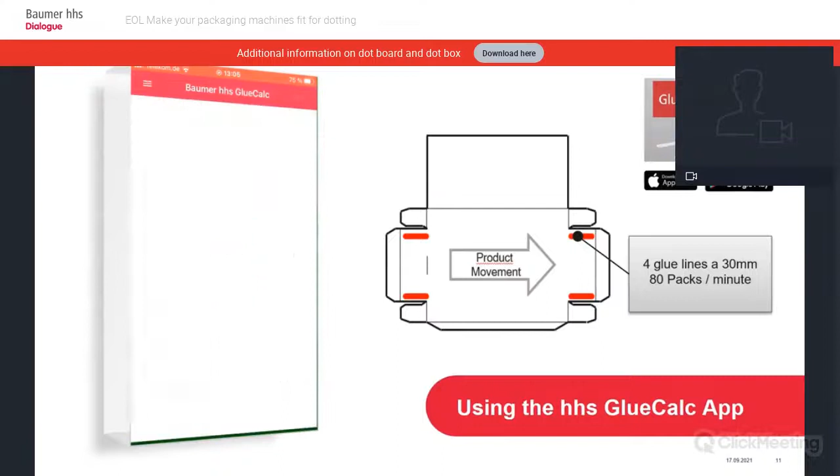When you start the app, you will find on the first page an OK button to start the calculation. In the next step, you have to enter your application settings. In our sample, we are using a carton erector with 4 glue lines on it. The length of our sample application is 30 mm for each bead. After that, we inform the app about our production data. In our sample, 80 products per minute and 120 production hours a week.

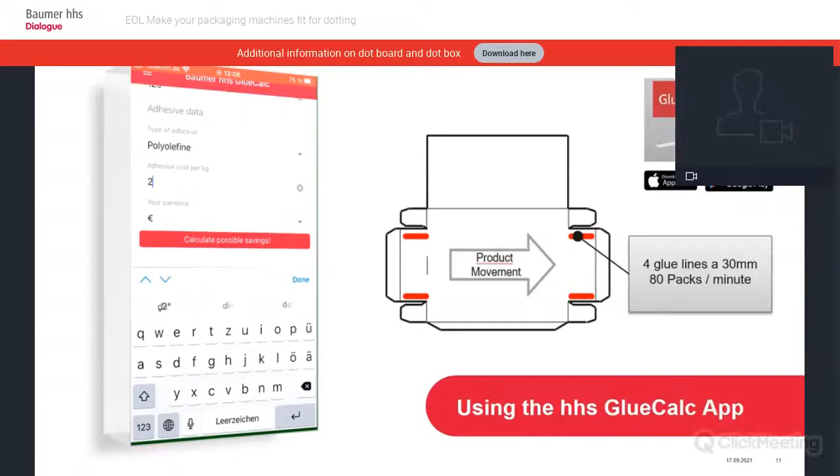In the next step, you fill in the adhesive data and your current glue costs. When you press the Calculate Saving button, you will see your production potentials in the graphic. With a 5 mm dotting, you get more than 20,000 euros saving each year, and on top, an annual carbon footprint reduction of about 80,000 kilograms. The result and the recommended production you can send to your mail address or share it with other people.

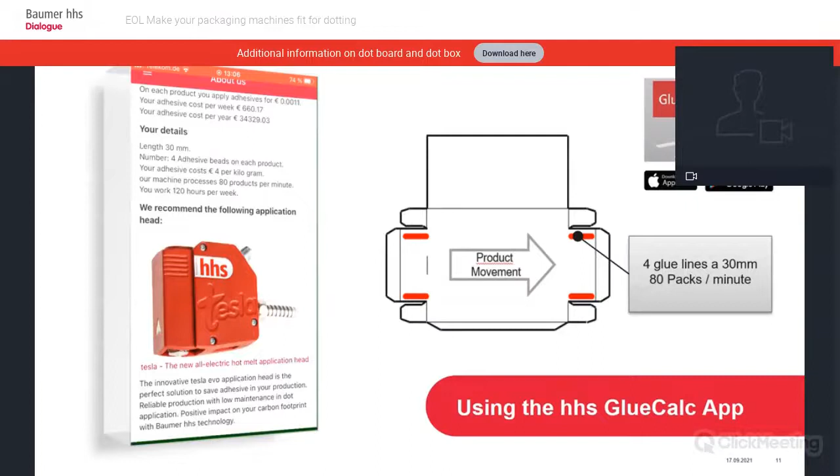And like quite often in life, sometimes less is more. And this is also the truth in gluing. Instead of squeezing glue out of the box, a dot pattern can fix the cardboard with a similar or even higher bonding strength.

Okay, our calculation is done now, but this is only theory. Let's have in the next step a look in our solution center. There we can see some of the products that we need to fulfill these calculated savings.

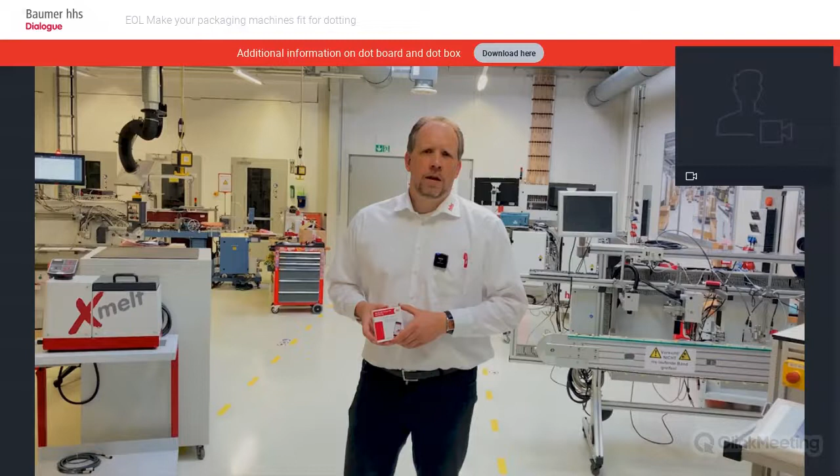Hello gluing friends, welcome to our Baumer HHS Solution Center here in our headquarters in Krefeld, Germany. My name is Martin Kotecki, and today I want to show you how you can react on a worldwide glue shortage, how you can reduce your carbon footprint, and how you can save money depending on your glue consumption.

The answer is dotting. With our dot box, we change from line to dots with a minimum effort. A lot of customers already started their saving program with our Dotbox Kit, and they saved more than 50% of their current glue consumption. So here we can see a conventional glue application, for example a pizza carton in a line mode, and today we want to show you how you can save this with a dot mode.

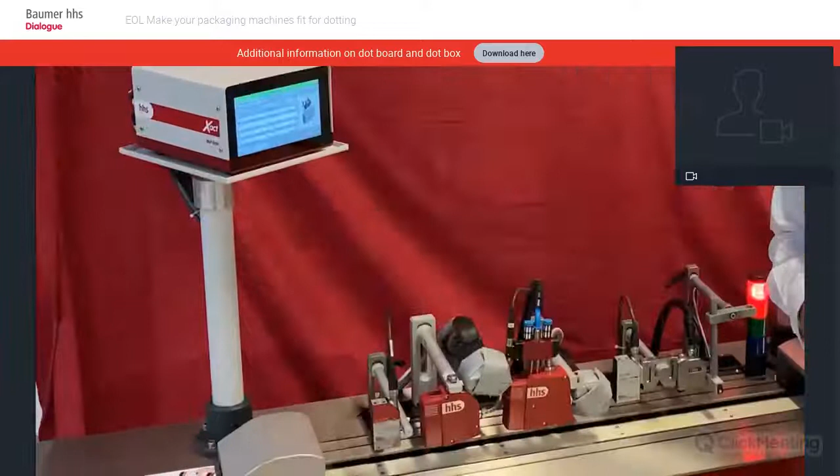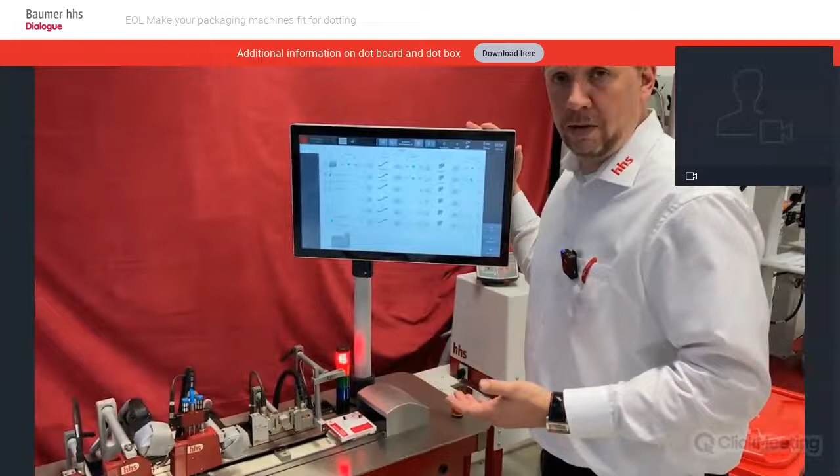We are proud that we have developed our Dotbox Kit, which makes a change from line to dot very easy. It just consists of our dot box and the Tesla applicator. On our simulator, we have an HMI that is driving our melter to set up the temperatures on gun and hoses, and also control classical applicators like pneumatic or our Tesla Evo gun, which can connect to a classic PLC. The PLC is driving a classical line application.

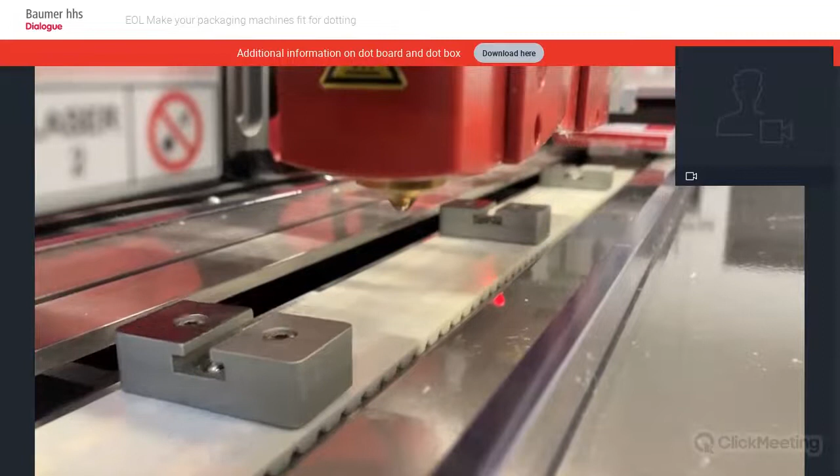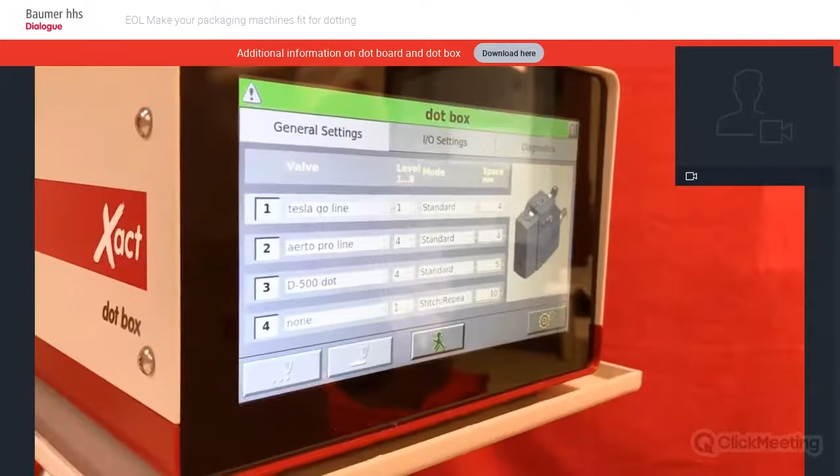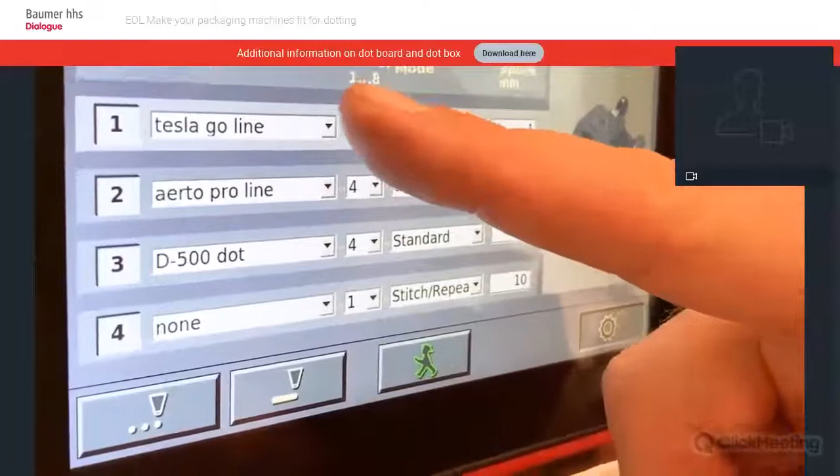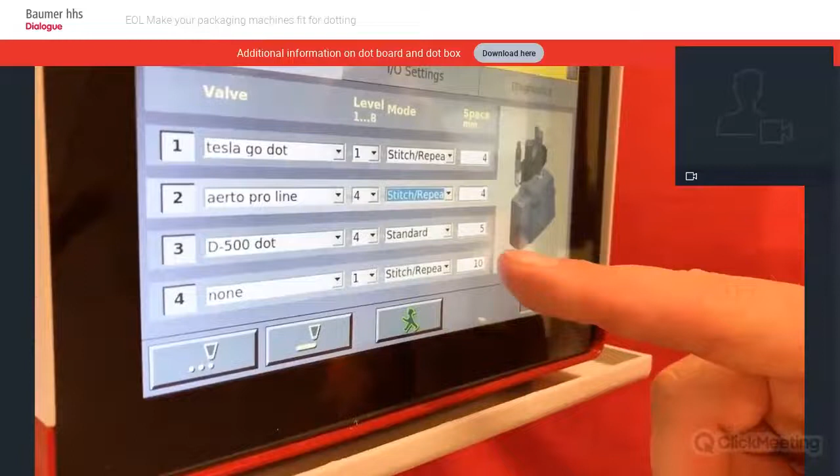To switch to a dot mode or to dotting, it's quite easy with our dot box. So we just press this button, the setup button, adjust the Tesla Go in a dot mode. We choose the stitch and repeat mode and set up the dot distance we want to reach in our application. The same, of course, we can do for pneumatic applicators. Now our dot box between the HMI and the applicator is changing from line to dots.

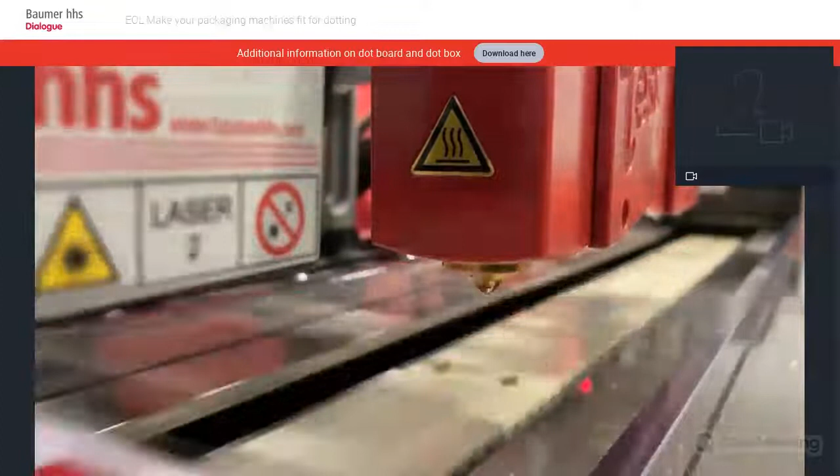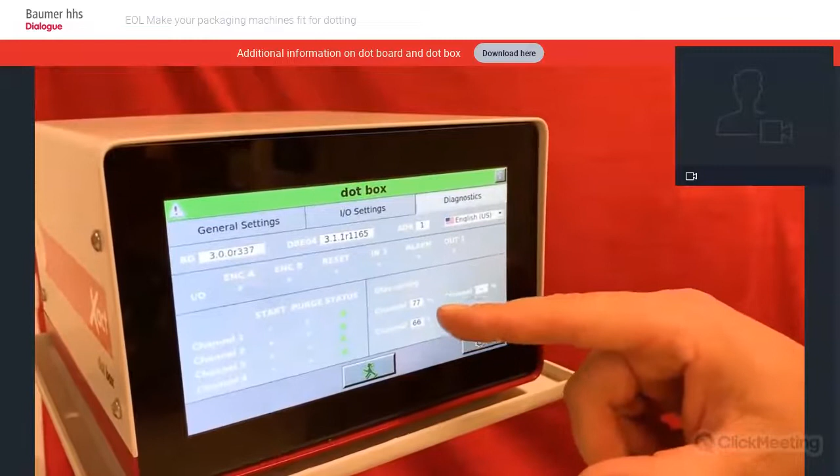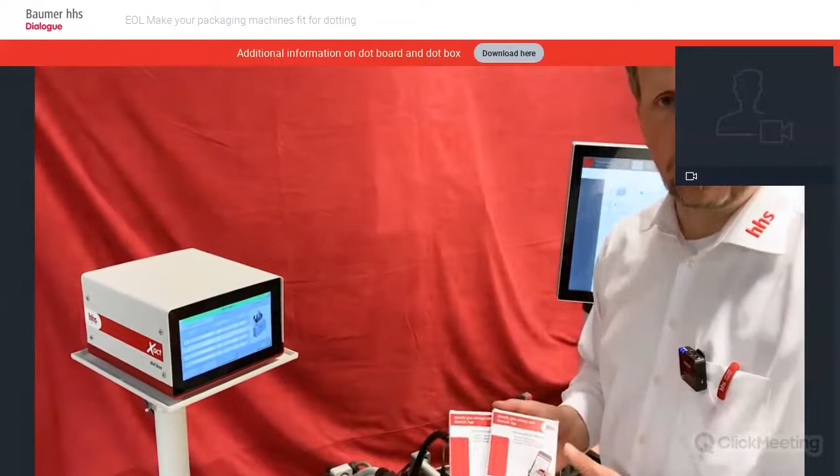So in our diagnostic tool we show directly how much glue you are saving depending on the dot distance and the dot size. So as you have seen, with the dot box it's possible to change the line in a dot mode with electronic or pneumatic applicators. We adapt the Tesla in the Dotbox Kit, so that is something which really makes sense to run your production with an electronic gun and with our dot box.

So for us, the Dotbox Kit is something like a starting kit that gives you the chance to check your calculation in practice. The kit includes 2 Tesla valves that can be connected to Nordson or Nordson compatible gluing systems. There is 1 dot box that can drive maximum 4 glue valves and generate your dotting pattern. As well, you find in the kit different screw-on nozzles with different diameters and 2 standard packaging brackets.

In case that the standard mounted 180 hose connection doesn't fit, there are also 90-degree and 45-degree hose connections included. Of course, you find also the right connection cables to solve a replacement in less than about 2 hours. Because of the low price for the starting kit, we expect that you can reach the return on investment in less than 3 months.

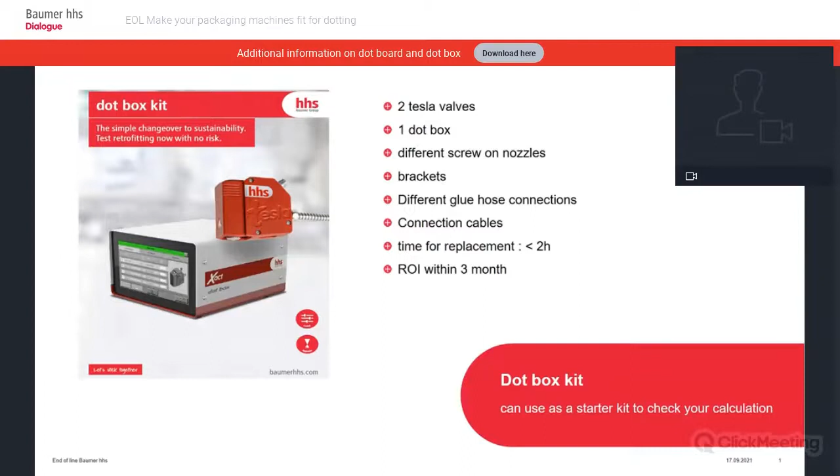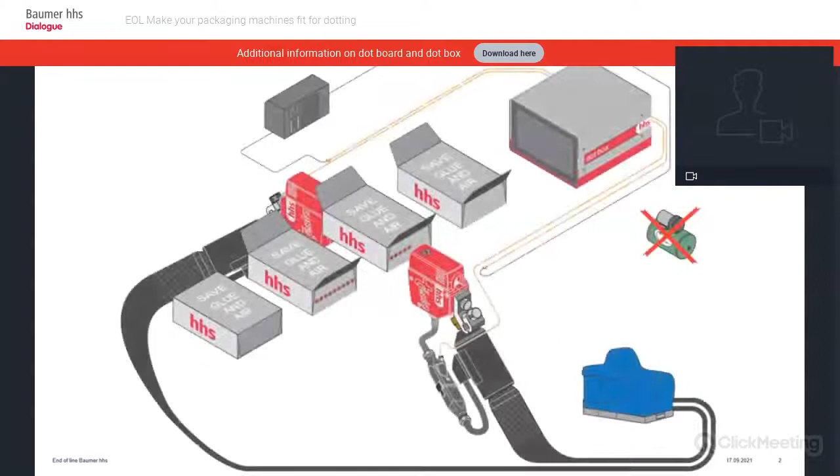Your current situation is maybe like this. After installing the kit, it should look like this. And that has the wonderful green effect that you don't need the compressed air anymore.

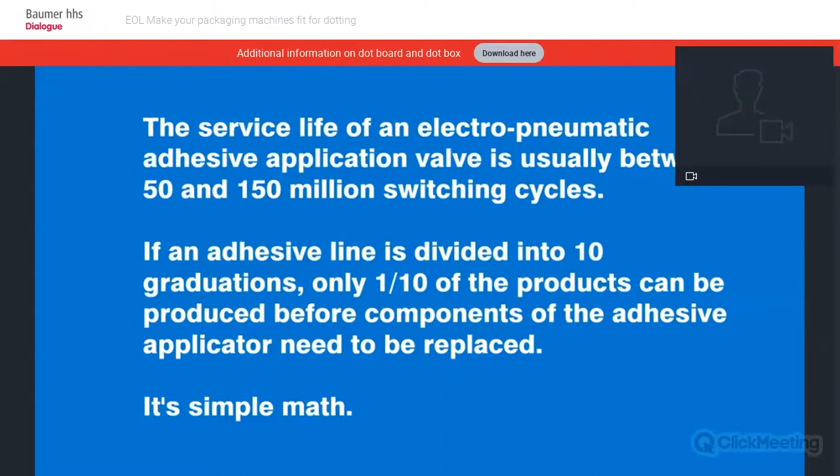It's simple math. Depending on what type of adhesive dispensing applicators you are using, your savings made through stitching and dotting may be at the expense of higher spare parts costs and downtime associated with changing them.

Why don't businesses realize they are paying more and saving less than what they could? The answer is, many companies have become accustomed to this situation and are not aware of the high cost of the spare parts used in their hot melt applications.

Electromagnetically driven adhesive applicators, such as the Baumer HHS Tesla, have a 10 to 20 times longer service life.

Why do many adhesive dispensing suppliers want you to stitch or dot with your current electro-pneumatic applicators? There are 2 obvious answers.

The first answer is simple. By offering you electromagnetic applicators instead of their standard electro-pneumatic, it would destroy their business model.

One of the leading suppliers of hot melt systems publishes that it generates 54% of sales from spare parts and services. Why would the supplier jeopardize that?

The second answer is, all suppliers have electromagnetic applicators in their stable of products. However, these have often been neglected in research and development and are no longer state-of-the-art. Most suppliers only use their electromagnetic guns when pressured, and often they only work in very limited situations.

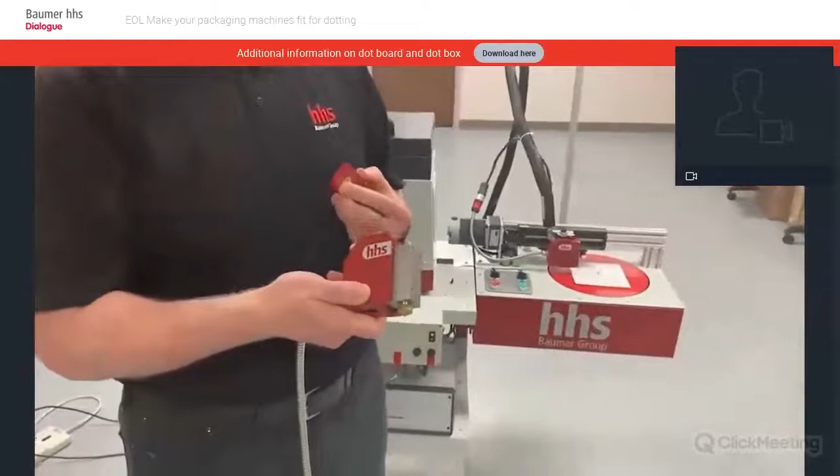And what's nice about it is it runs off the same 24-volt signal that your pneumatic applicator runs off of. So there's really no change for what you have to do in order to go from pneumatic to electric. This also means that you're not using compressed air any longer.

Compressed air is a very expensive resource, and it's something that you have to bring to the machine, you have to bring to the gun, and a pneumatic gun will operate differently depending on what type of pneumatic pressure is coming to it.

If the pneumatic air pressure drops, then the gun doesn't cycle, or it wants to string, or it wants to drool. You'll never have that problem with a Tesla gun. You'll always operate the same way each and every time.

The Tesla is also very, very robust. I wish you could feel this, but it weighs about twice that of a pneumatic applicator. It's a tank. It will last a very long time.

So you're looking at about 1 billion cycles for this gun versus 50 million for a pneumatic applicator. Now, we talked about how to dot your way to a greener day.

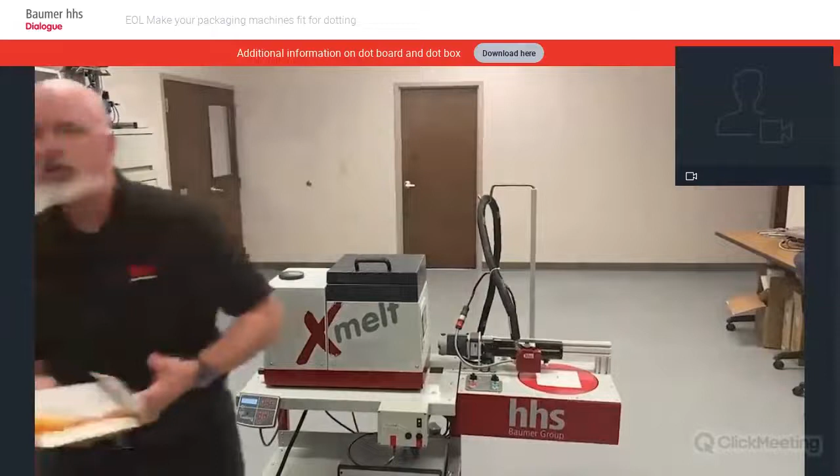So what does that mean? What we're going to do is, on a packaging application, take what you normally would do as a bead, which would be a solid line of adhesive, and instead we're going to dot it.

We're going to take that 24-volt signal and run it through a dot box, and we're going to break it into these dots. When you have a very long bead, there's a lot of residual heat that sits in the product.

So that can lead to pop opens a lot of times. You have to think about it as a jelly sandwich - if you've got a carton and both sides are glued together and it pops open with glue on both sides, then you've got a cohesive failure. A lot of times that's because there's too much adhesive on the carton, and that's why you get the pop open. Going to dotting really eliminates that, because now you have very individual applications of glue.

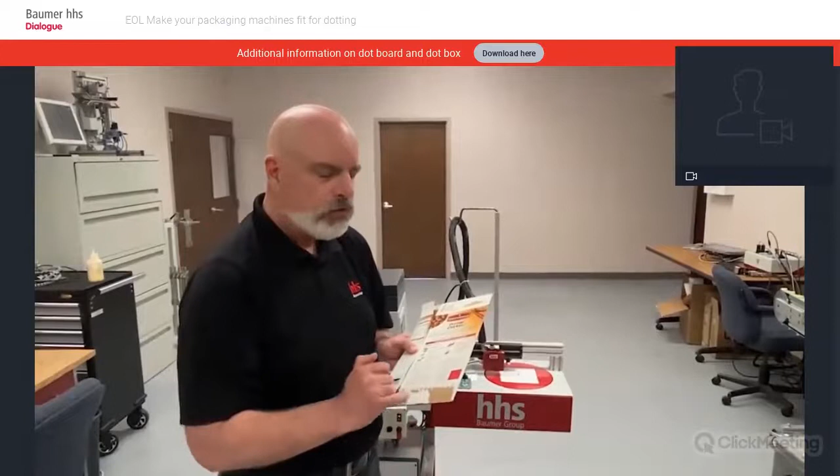So I'm using 50% glue, and you can still see how I'm getting great fiber tear. If you try to stitch a bead, you're still basically having just larger beads with a small break in between, so you're really not gaining that much for your application. But in this case, when we do the dotting, we're reducing glue by 50%, and we're still getting a good tear pattern.

Now, you may not know about Baumer HHS, but we've been in the business for a long time. We're really known for making the folding carton. The application that we do is for very high speed cold adhesive gluing. Cartons like this will run anywhere between 1,000 and 1,500 feet a minute. That's incredibly fast, much faster than what you normally run in general packaging.

So what this does is it says that we know how to run an electric gun, we know how to make an electric gun last long, and we know how to dispense the adhesive. We've taken that knowledge and transferred it to hot melt technology, and that's what we've done with Tesla.

In order to get the Tesla to work the way you want it to, we've developed a dot board. What the dot board does is it takes that 24 volt signal. We're able to program it, and this can go either into the OEM box and run from the PLC and take that 24 volt signal, or we have a dot box that we can sell that goes in between the applications. So you can either do it inside, DIN rail mounted, or as a separate box in the system itself.

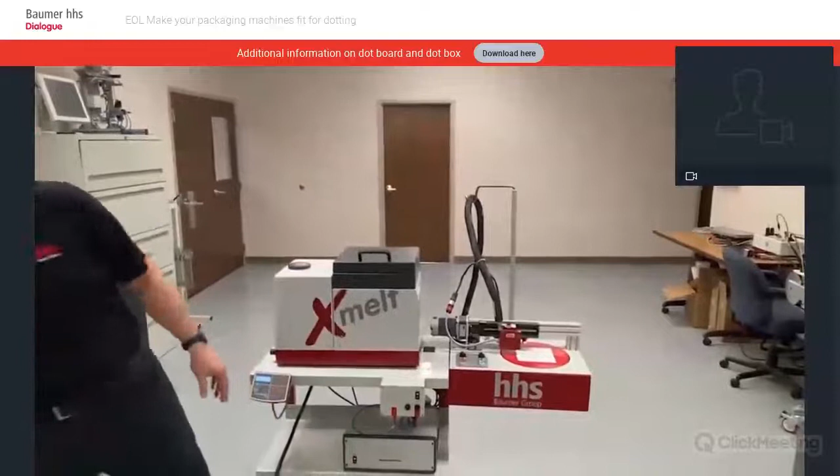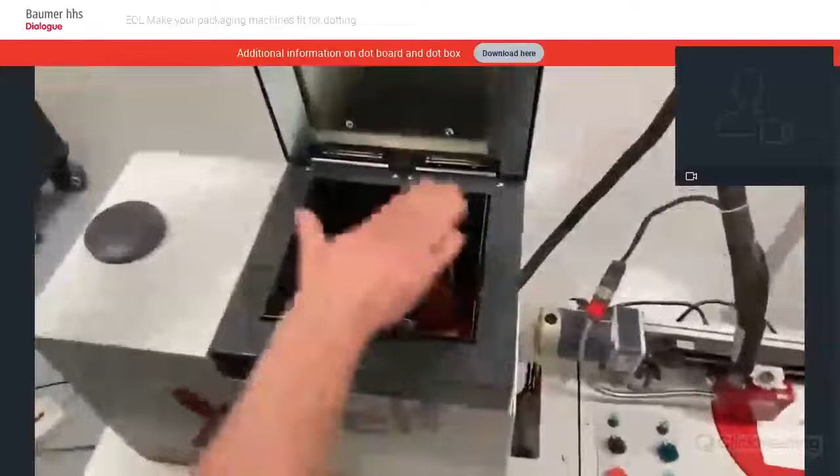Now in this application, we're showing all HHS. So what we have is our Xmelt unit, which warms up in about 20 to 25 minutes - that's typically twice as fast as most melters in the market right now. So you're using a lot less heat. The way this is set up, if you want to take a quick look, we've got it set up so it's got the fins, so the top portion is unheated and only the bottom portion is heated.

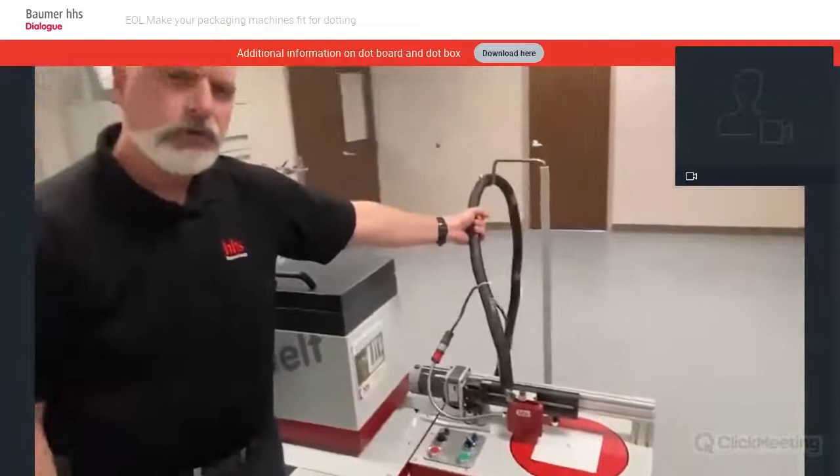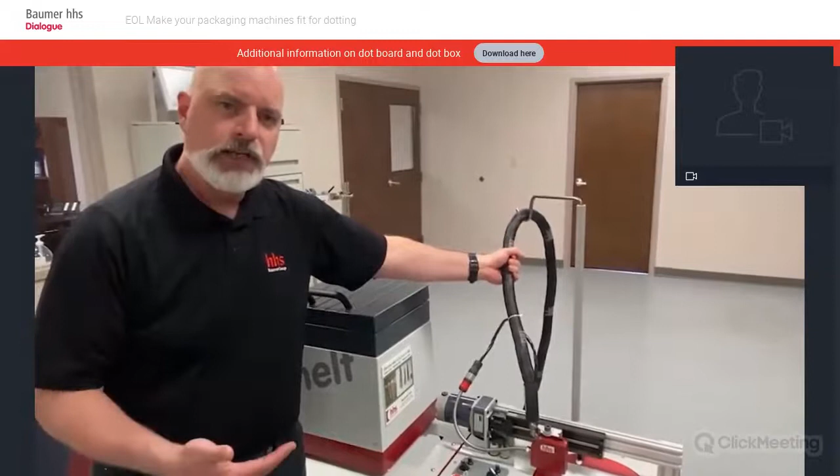We run that through this hose, and this hose is only 30 millimeters in diameter. Most hoses are 45 millimeters in diameter - it's like trying to wrestle an anaconda through your OEM machine. By being able to go to the smaller diameter hose, you're not losing anything because the hose core is the same as what it would be on the larger 45 millimeter hose. So it's an 8 millimeter hose core, which will give you the same flow. You're able to get the flow and have a smaller overall profile, which is very beneficial for any type of maintenance, or if you're trying to take longer hoses through the machines.

And then it comes to our Tesla gun. This whole system right now is set at 350 degrees. The Tesla with the cover on it - what this cover does is it protects you. So for incidental contact, when you're trying to change a nozzle or take this off, it's going to protect you from coming in contact with it. And that's a really beneficial safety aspect for the machine.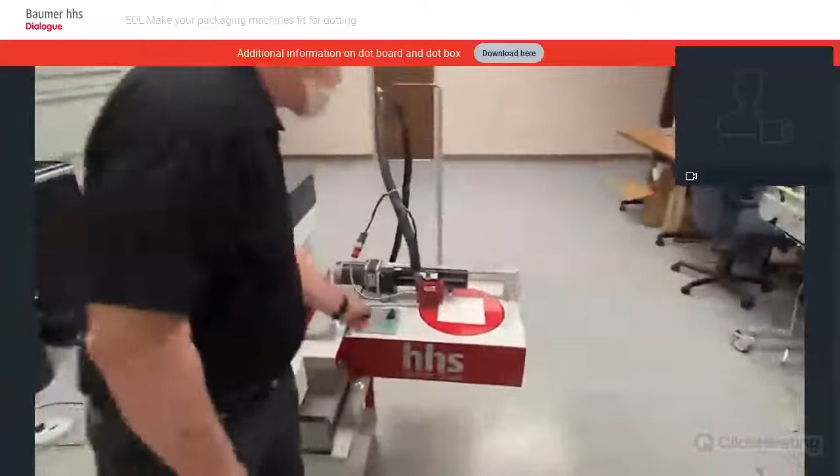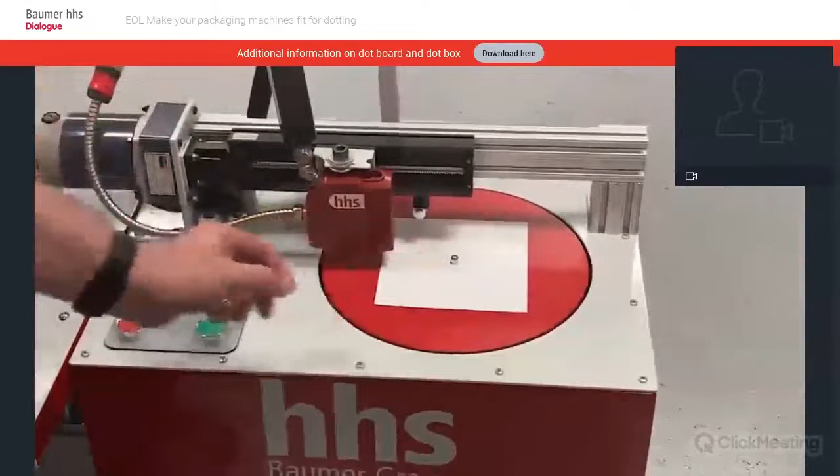Now what I'm going to do here is I'm going to show you something here with the Tesla gun. So what we're going to do is a 50% glue savings demonstration. I'm going to run the gun, and I'm going to run the speed of this very slow. And you can see here...

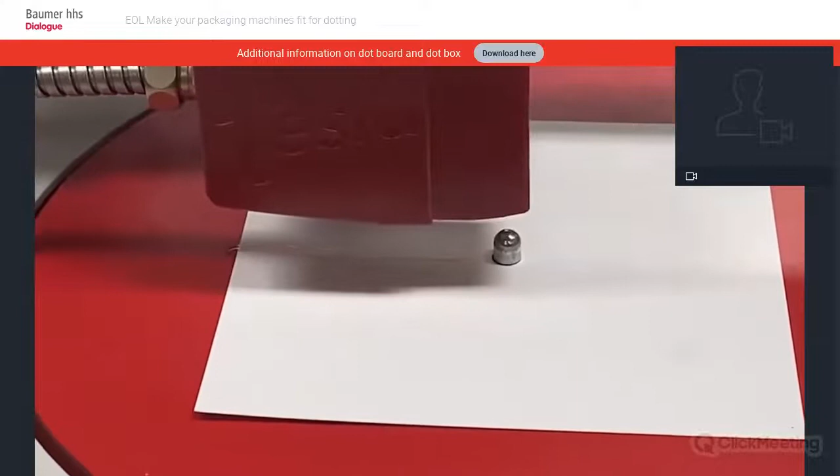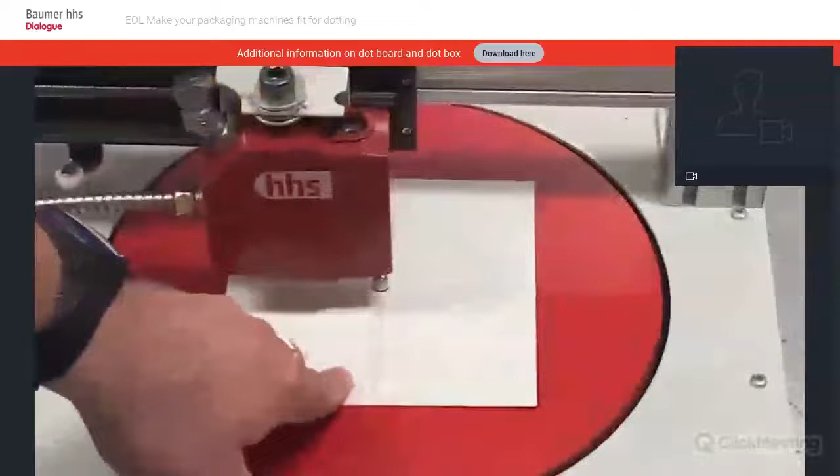The Tesla is very quiet, almost 30 decibels quieter than a pneumatic valve. And from what you can see here, this is 50% glue savings at that speed. You can see that it's almost still a solid line, but there's 50% less glue at that same speed as what you would have in your application if you were doing that full bead.

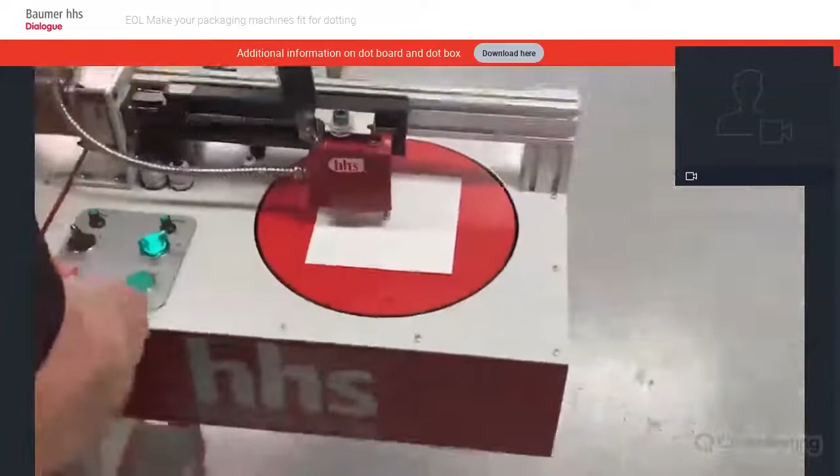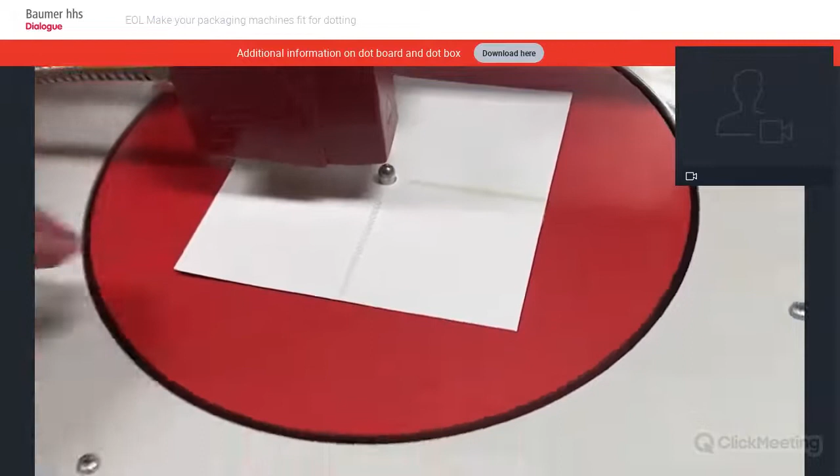Now what I'm going to do is run this again at a faster speed. Here we go. And you can see here, now we've got the individual dots, and you can start to see the individual dots as the speed increases.

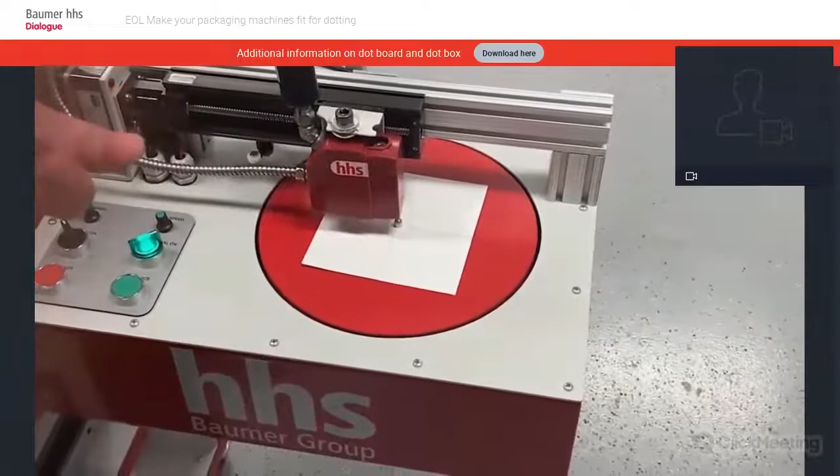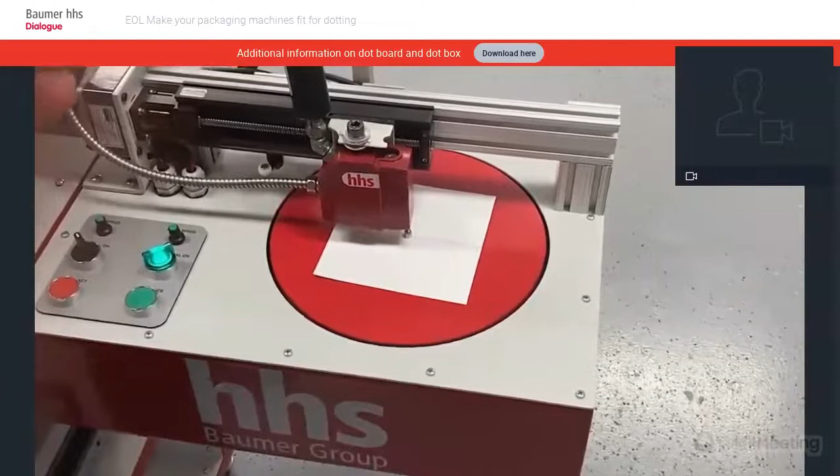So we're going to take this back one more time and increase the speed. And you can see the dots spread out, but the dots have remained the same size as we go through the whole aspect of this demonstration.

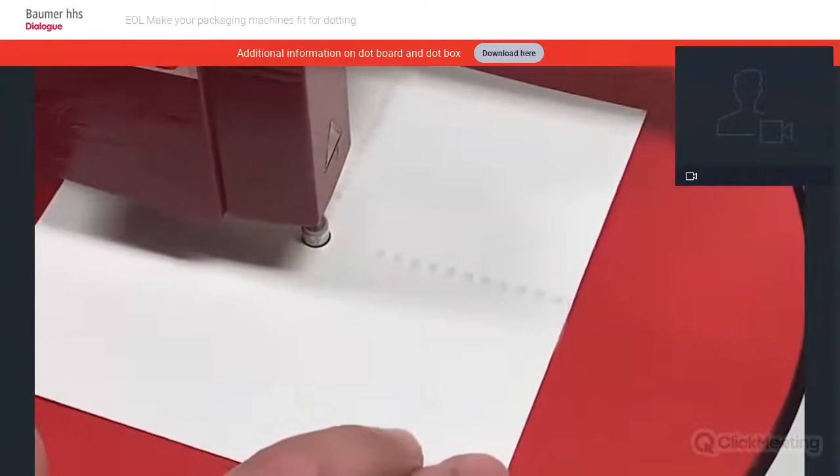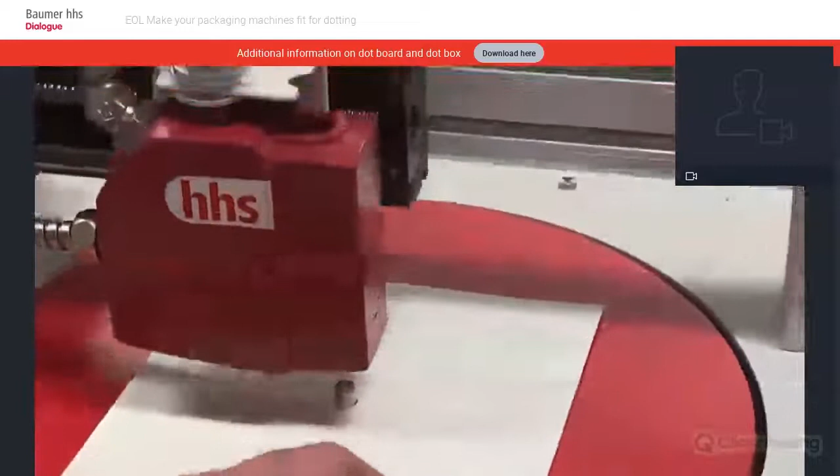So let's take it back for the final one, move it forward a little bit, there we go, and then we're going to do the final one at high speed. So you can see that the dots are the same no matter what the speed is. You're able to have the same amount of volume every single time, no matter what your speed is.

So this is a really great way to control your volume, to control the amount of adhesive that you use, and still get a really good bond on your application. Now, if you'd like to know more about this, at the end of this demonstration there'll be a chat on the website, and we'd be more than happy to answer any questions you may have.

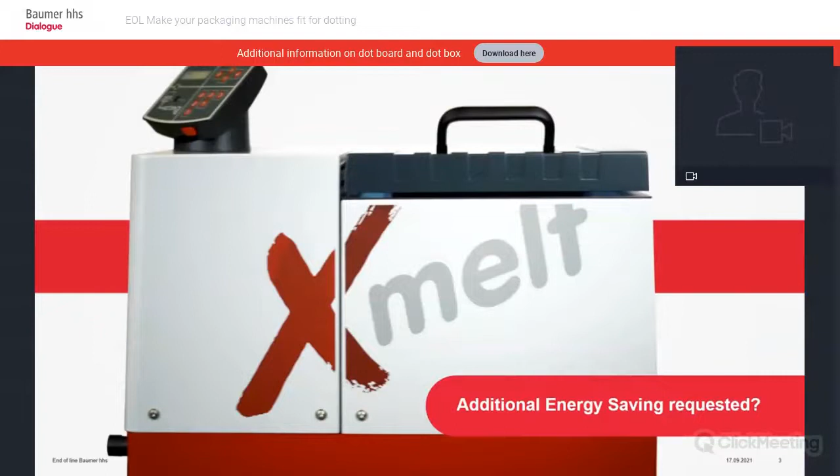With our Xmelt unit, you can even improve your energy balance by 56%, depending on what kind of gluing unit you are using right now. So if you are interested in that as well, don't hesitate to contact your local Baumer hhs gluing friend.

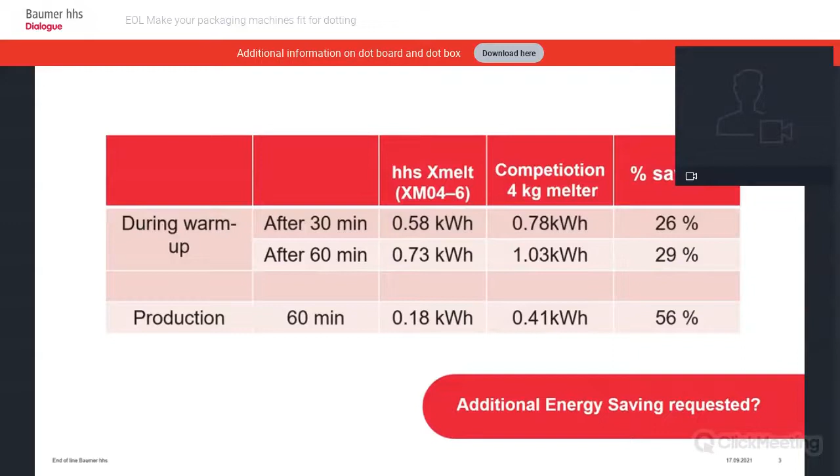Okay, our third step is done. We have understood why the hhs equipment can be useful for the packaging industry. Before we start our dialogue, let's have a look at our fourth step, the experience in the market.

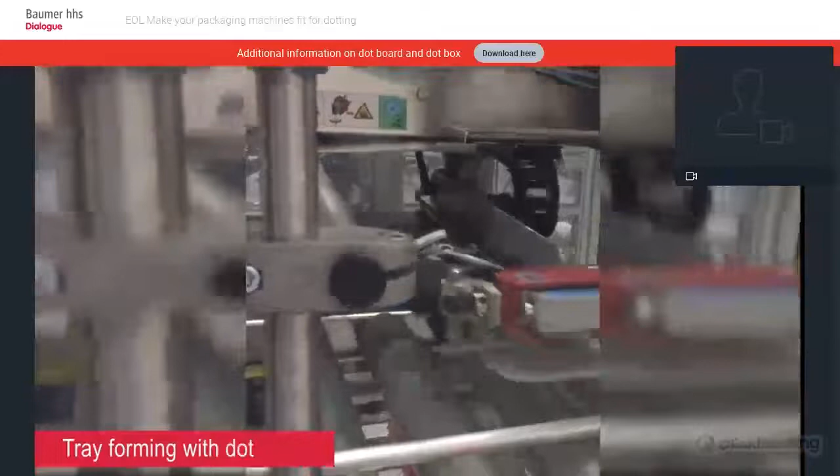Yeah, thanks to Rick in the United States, and coming back to what he's saying about the gaskets: Tesla is running without the dynamic gasket, which you can see in the animation.

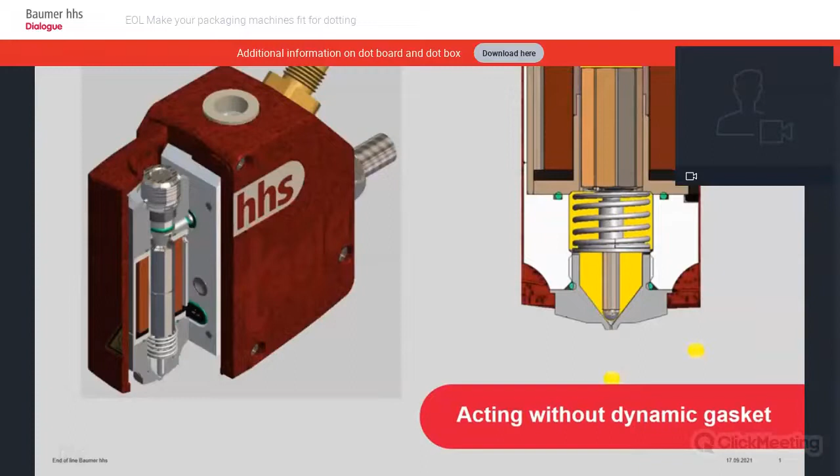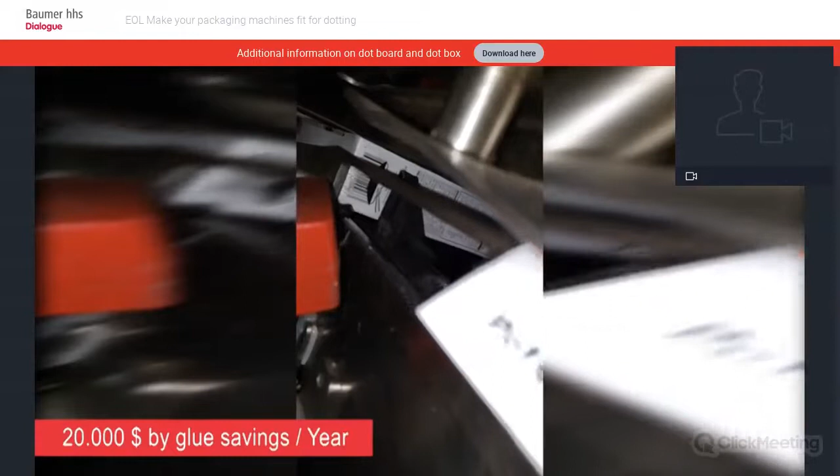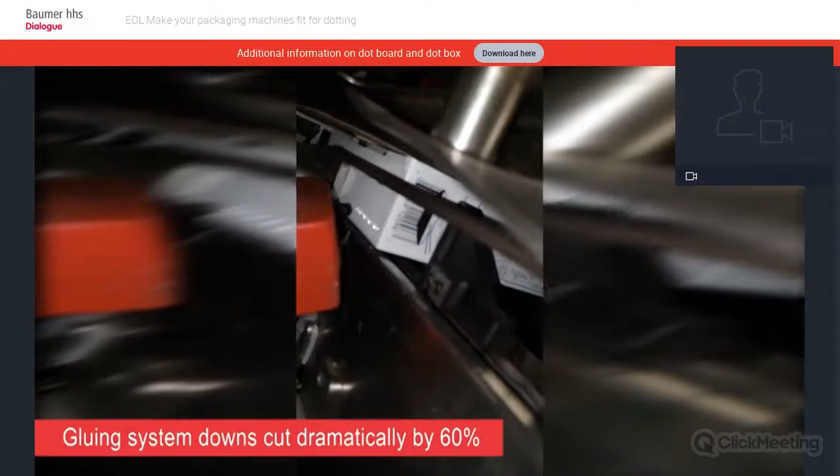Hi, this is Victor Sheldon from Mountain View Packaging in Boise, Idaho. Our experience with the HHS Tesla guns and dotting program has been phenomenal. In our first year, we saved right around $20,000 in glue savings by just switching over to the dotting system, as well as cutting glue system downtime dramatically, about 60% less than what we were having prior to our glue systems.

I hope those videos give you a help for what you can do in your production. At least we would like to have also a short look at our gluing friend Tongli Wei in China. He is the head of Baumer HHS in Shanghai and helped a customer in the beverage industry. In the first step, he was doing what we have described today in our webinar on a first packaging line.

In the second step, he made a rollout plan to do the improvements for the complete factory. With the shown production data, he saved about 300,000 euros each year, and on top of that, after 2 years he is still running with his first Tesla valves.

Ladies and gentlemen, we have finished our 4-step program for today. We have learned how we can make our packaging world a bit better. Packaging is always important because it is saving our food and goods that we have produced with the energy of our planet. At least we are also happy that our corona vaccine was even packed very well.

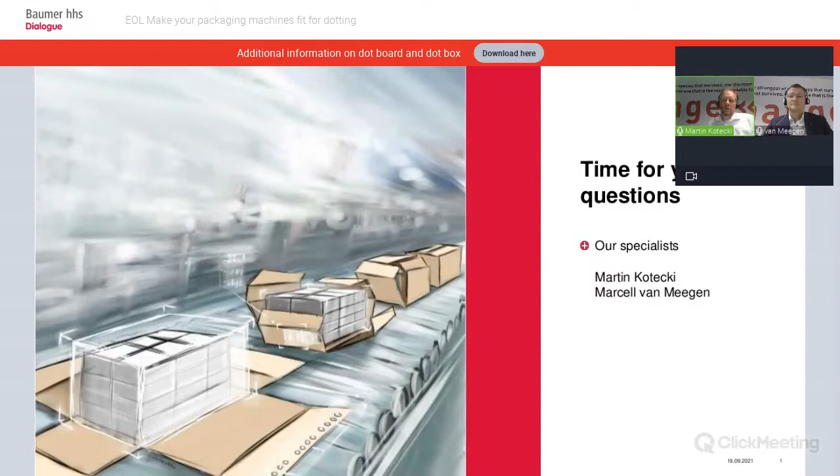I don't know if Andreas is coming back, but I'm just seeing here's the first question in the chat, which is asking about the viscosity where we can run the Tesla applicators. This is a quite good question because most packaging glues are in a viscosity between 1000 and 2000 millipascal, and this is also the limitation for the Tesla. So more than 2000 millipascal is something I don't want to recommend.

I mean, the gun itself is still acting up to a viscosity of about 5000, but we need energy from leaving the nozzle tip to reaching the product. And for that reason, I would recommend to have more or less something about 1000 millipascal. So maybe looking at the glue or looking at the temperature, how you drive that glue.

Yes, now I'm back on track. Sorry, my micro was muted.

Yes, Martin, there's a question coming up. You mentioned that the Dotbox can only drive 4 valves. What can a customer do if 5 or even 9 guns have to be driven? Yeah, a good question. So the Dotbox, first of all, is really like a starting product, to check what we have made with the GlueCalc app. So it's an idea, it's a calculation, and you can try it before you buy something.

So you can do it with 1, 2, 3, or in the kit there are 2 guns where you can try it. If you see, yes, exactly, it reached what I expected, then the professional version is the dot board, which can be integrated in the machine PLC. There we can drive 60 guns or even more with one display or with a notebook, with a special software to drive this dot board.

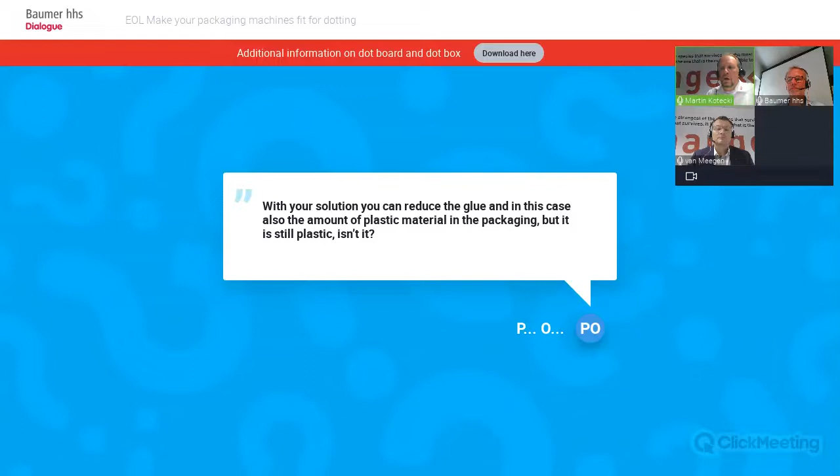So then we have the next question. With a solution, you can reduce the glue, and in this case also the amount of plastic material in the packaging. But it's still plastic, isn't it? Pierre is asking. Yeah, the traditional hot melts, yes, but I know that there are also a lot of topics on the desk of the glue suppliers. And at the FachPack, we will present a new concept for materials which are really bio-based. So in this case, we will solve it to get the plastic completely out of the packaging.

It's a little bit a step forward. It's not finished, but who's interested can have a look at the FachPack next week, where we present the idea for the first time. Okay, then we have the next question from Sita. Can the Tesla gun work for cold glue as well?

The Tesla gun, not really. This is definitely a hot melt applicator, but we have, of course, several other glue valves which can be driven with a Dotbox in the same way. So a cold glue line application can even be interrupted by dotting, because about 90% of our glue applicators in cold glue are also based on the similar principle.

So it's electromagnetic with different energies, or creates a different magnetic energy depending on viscosity. So yes, we don't have the Tesla, but we have other glue valves for cold glue where you can do the dotting as well.

Perfect. Thanks a lot. And then I have a question maybe Marcell can answer. Can the Tesla valve run with all glues available on the market? Pierre is also asking.

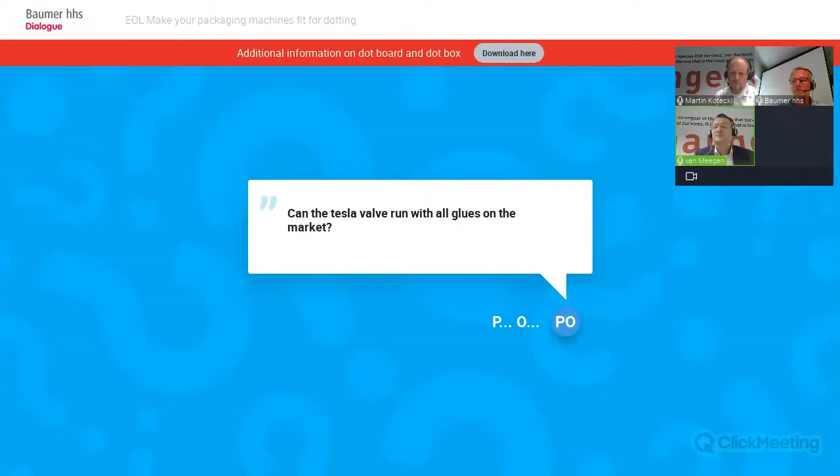And in the end it can be that different glues are tested beforehand. But if we are in the range of a good viscosity, which is possible with the Tesla applicator, then you can use different ones. Thank you, Marcell.

I get a next question. Is there more wear in the dot application than the line application due to the increased number of cycles? Martin, is this your question? Yeah, so like Rick explained in the video, of course, when you increase dotting, a normal applicator will go down in a very short time. But this is the difference with the electronic applicators. They are made for high frequencies and long running times. So here it definitely makes sense to run in dots.

So 1 billion cycles is something that will run your machine not only for weeks if you're dotting. With a classical pneumatic applicator, depending on the machine speed, how long the bead is and how many dots you're getting in, it could happen that after some weeks you have to replace the first modules or some mag valves on the top of the gun. But because of the 1 billion movements, it's something the Tesla definitely can do.

So it's even, from my experience, much better if you run in a high frequency, because it also has a recleaning effect. If you have a frequency of 100, 200 hertz on the gun itself, maybe you remember this animation, there is this movement of the needle inside, and this keeps the gun clean from internal dirt and so on. So for that reason, it's quite good when this is running in dotting, and it's more a benefit to run more stable. Okay, perfect. Thanks a lot.